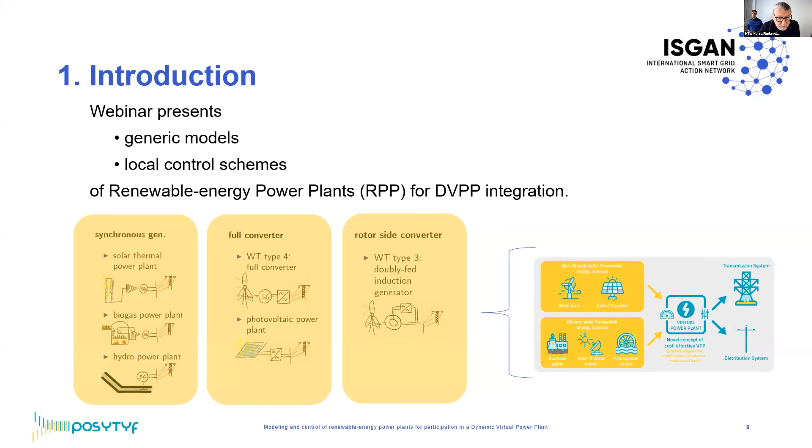So what we have actually, as mentioned before, we have different types of power plants: wind turbines, wind farms, PV systems, biogas, hydropower, and so on. That is very important because here we describe all these different types of technology by one unified model structure. That means we have a unified interface between the higher level and the lower level control. So we have some embedded local controllers, which I'll give you an example of how we have tuned this, and which model we have considered and designed. Then I'll give you later an integration of these different models into higher level things.

So here are the 4 important questions which we have addressed. The first question is, which RPP dynamics are important? RPP stands for renewable power plant. So which dynamics are important for higher level design? Then the question is which functionality we need, which is necessary for the design of a DVPP, and which kind of model structure can we use, so which are suitable for the dynamic representation, to represent dynamics, and also to take into account the needs of a control design. That means, are these suitable for a model-based design?

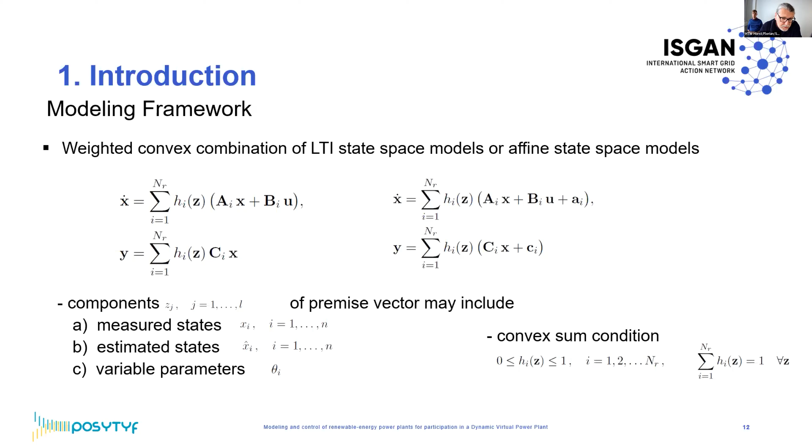Now I come to the requirements for the modeling. Our models need a reference input, which comes from the DVPP level for the devices. The devices depend on the applied control scheme. That means we have not just the physics of the system, we also have the control scheme, which is in the closed loop, and this is of course important. We have a closed loop system, so we have a strong dependency between the physical model and the controller in a closed loop. You see this on the scheme.

So here we have to distinguish for each of the devices between 2 main tasks, 2 main submodels. The primary power, that means the physics to transform the renewable energy sources, wind, measured by effective wind speed, and also, for the PV, the radiation. We convert this into a DC power, and based on the DC power, we're able to convert this in a way which fits here to the grid. So we distinguish between 2 different kinds of converters: grid following, grid forming.

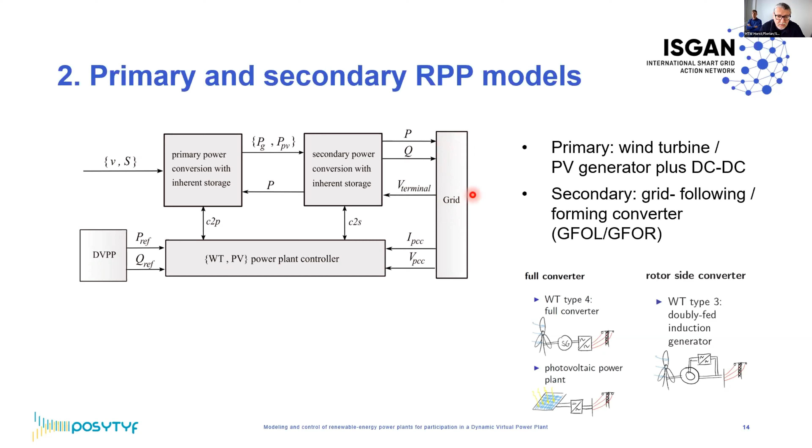So in total, we have here power plant control, which interacts both with the primary and the secondary power converter, and we have the external link to the higher level dynamic virtual power plant. And of course, this is the connection to the grid. We will feed the grid, inject the grid by power, and distinguish between reactive and active power. Feedback is the voltage terminal on the DVPP level, and this is on the local level.

So now I switch to the next task. This is where I take over. I'm Florian, and I will present the primary converter of the wind turbine at this point.

First of all, the objective for the modeling was to provide a process for the derivation of wind turbine models that are suitable for both control design and simulation studies. Of course, there exist different types and designs of wind turbines. In this case, we considered a three-bladed horizontal axis wind turbine with a power rating of 5 megawatts, and a type 4 wind turbine that is connected by a back-to-back converter to the synchronous generator on the wind turbine side, as shown here.

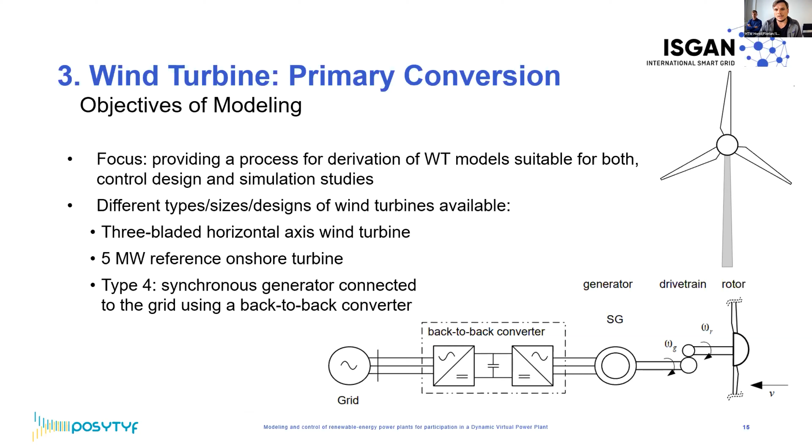For our wind turbine modeling, the main power dynamics are determined by the rotation that is influenced by the nonlinear aerodynamics. That is the reason we use the TS modeling technique Horst described earlier to model the aerodynamics, the drivetrain, and the mechanical modeling. While the mechanical modeling has little influence on the electrical grid, we still included this in our models in order to be able to evaluate the loading that would result in certain scenarios where the turbine is operated. As a renewable energy source, we use turbulent wind fields that can be generated according to different characteristics like turbulence intensity, and then calculate an effective wind speed that is fed into the wind turbine.

For the controller, we derived a controller that is capable of operating the turbine in a large operating range, which will be discussed in a second, and it is based on an observer that reconstructs the wind speed. This is important for monitoring and estimation of the available power, also for the control scheme.

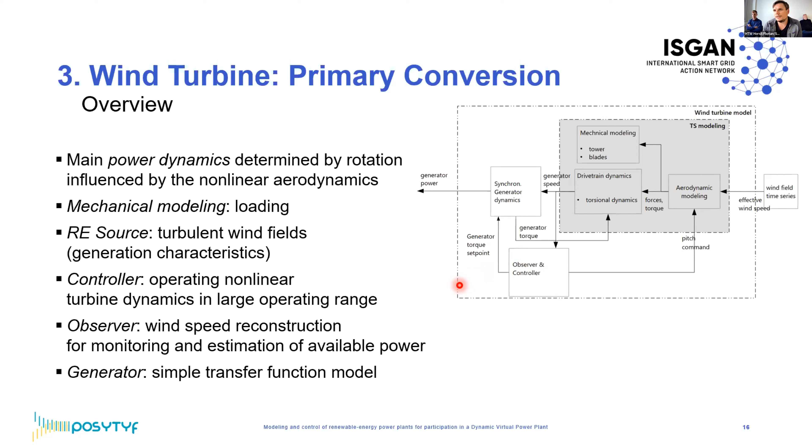The generator is usually just depicted as a simple transfer function due to the decoupling of the mechanical side and the electrical grid by the back-to-back converter in type 4 wind turbines.

So what we did here was we used FAST, which is an aeroelastic simulator, as the foundation for our modeling. This aeroelastic simulator is suitable for certification of wind turbines and is used in the industry for load evaluation. It inherits different degrees of freedom, like aerodynamics, towers, blades, drivetrains, or even platform in case of offshore wind turbines. It doesn't have any electrical connection, but it has a modular approach to parameterize the individual turbine components.

And then we use the built-in linearization functionality to derive the partial derivatives or Jacobians, and then integrate this into a TS model as shown here.

So when we have the FAST model, we perform a trimming analysis to find out about the steady-state input values that would result in steady-state behavior of the turbine in our operating points of interest, then use the linearization and then build up this model.

For example, we can see in this plot the pitch angle and the generator torque at different wind speeds and power operating points that would result in steady-state behavior of the turbine.

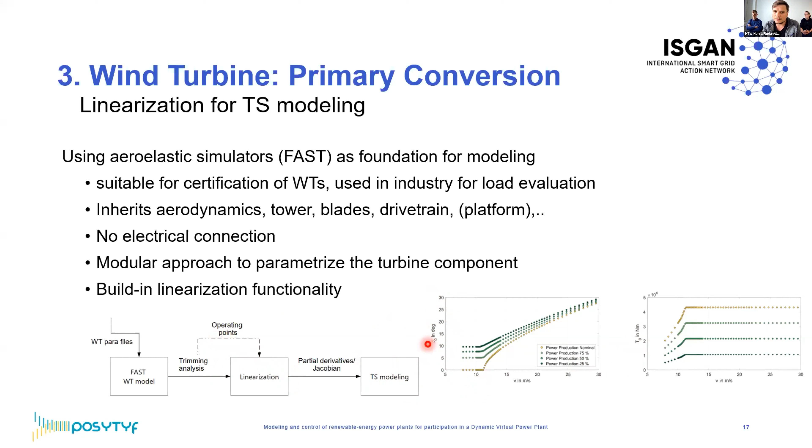Afterwards, we can simply build up a TS model for the entire turbine. So in this case, we decided to include the tower side-to-side motion that is shown here, the tower fore-aft motion represented by those states, and the drivetrain motion that is represented by those states, and integrate this into a TS description as given by Horst.

Therein, the wind speed is a premise variable of our TS description, and the wind speed is actually also treated as a disturbance to the system, as shown here. And the state space matrices that are used are gained by the linearization procedure.

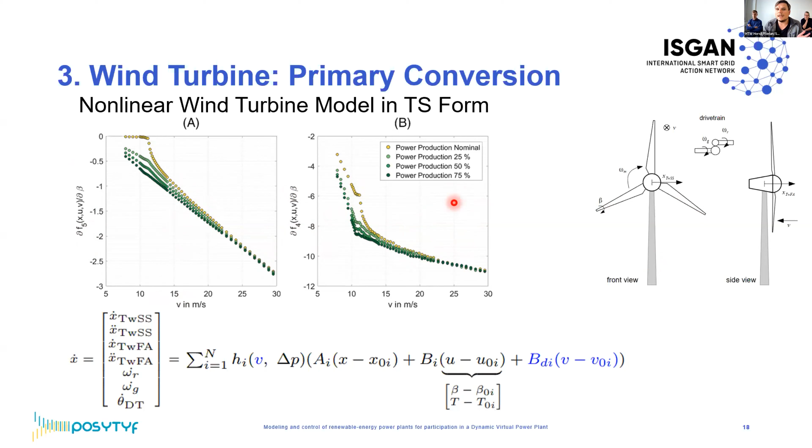So for example, here in the upper plot on the left-hand side, we can see the sensitivity to changes in the pitch angle of the rotation on the left-hand side, on the right-hand side of the tower fore-aft movement. And this clearly implies the nonlinear behavior that we are facing with the wind turbine.

So then there's a problem remaining, and that is the wind speed is usually unmeasurable for control purposes. So we've seen this equation before, where the wind speed is treated as a disturbance to the system.

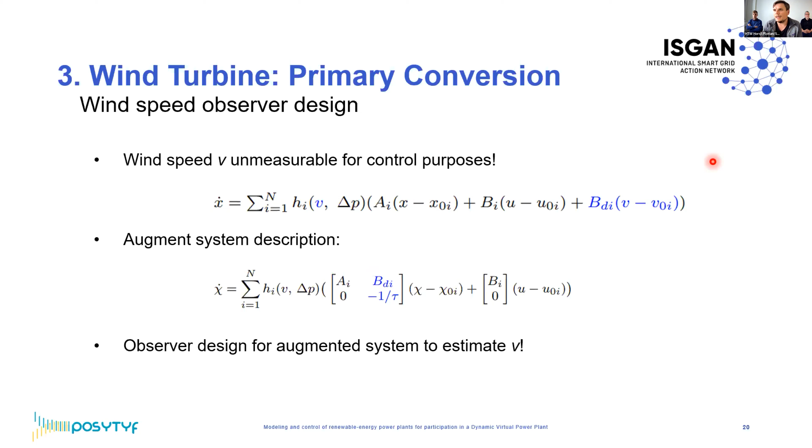And further, the wind speed observer allows for the implementation of condition monitoring systems, so-called digital twins. Also, the estimation of the available power. So when the power is not at its maximum, we can still use this reconstructed wind speed to identify the maximum possible power that can be extracted from the wind turbine.

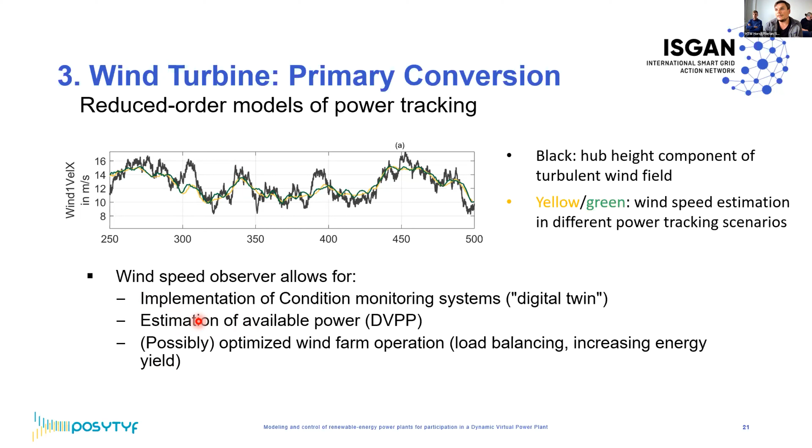And possibly we can enhance an optimized wind farm operation in terms of load balancing, or even maybe increasing the energy yield in total. But this is still subject to research and needs to be further investigated.

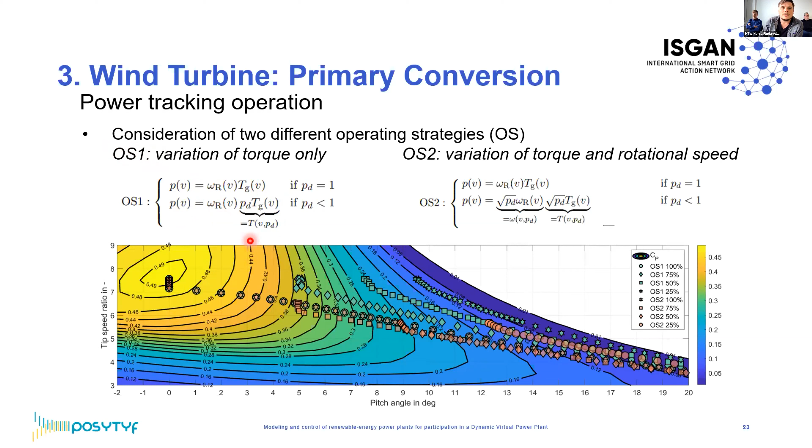So the question we were answering was: what are the different dynamical properties of different strategies? For that reason, we investigated two different strategies. The first, operating strategy 1, relies on varying torque only when we want to achieve the desired power level from the higher level control scheme, keeping the rotational speed constant but varying the torque depending on demand. In operating strategy 2, we exhibit a variation of both the generator torque and the rotational speed to match the desired power level, as shown here.

For a maximum power point tracking operation, which is the usual way the turbine is operated, both operating strategies actually share the same operating points. However, we can see that depending on the power level, we are operating at quite distinct operating points on this power coefficient surface.

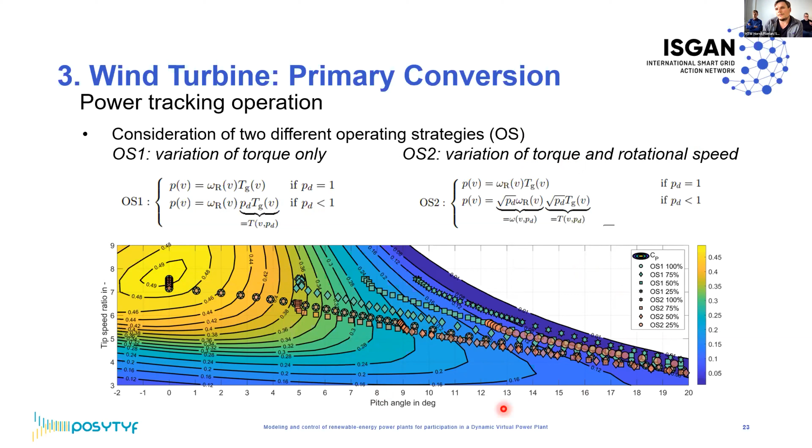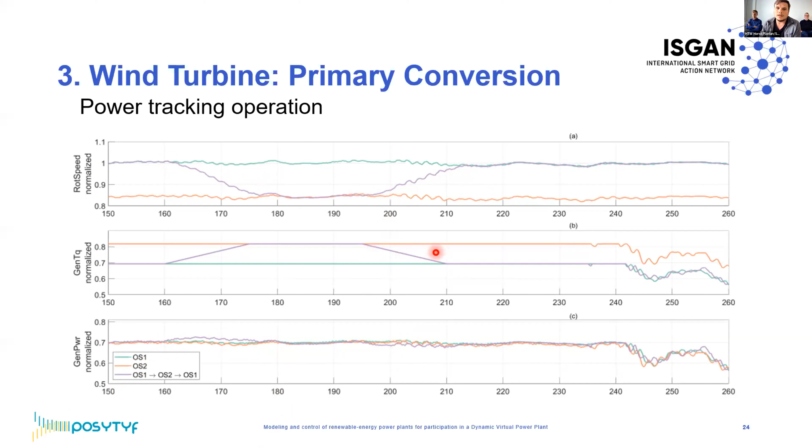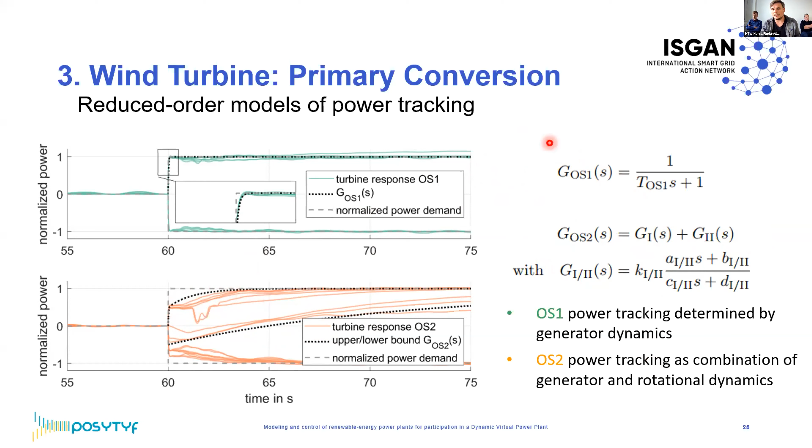So now I talked about the primary converter side of the wind turbine, and I will also introduce you to the secondary converter side that Horst mentioned earlier, and this will also apply for the PV system that Stephan will present in a second. So for the secondary side, as mentioned, we use a back-to-back converter to connect the turbine to the electrical grid, and there we included the DC link dynamics, and the main dynamics that govern this converter are the control schemes within.

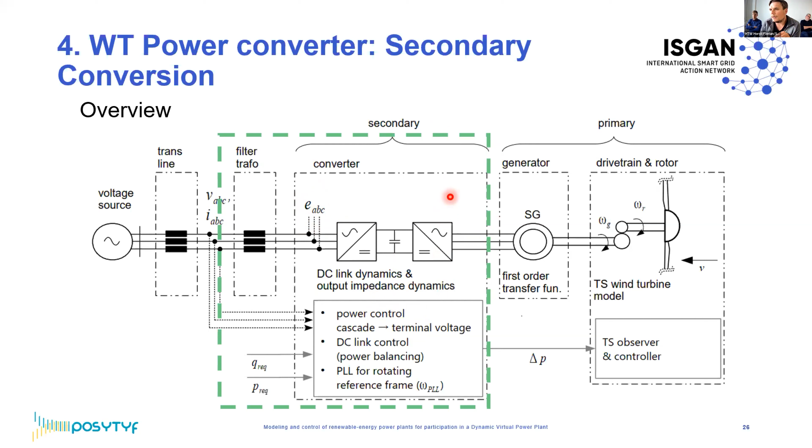So therefore, we consider two different schemes. The first one is the commonly used grid following scheme that relies on the use of a phase-locked loop, as shown here. So this is a simple power control cascaded with an underlying current controller, where we use the measurement of the current and the voltage at the point of common coupling to calculate the powers. Then this complex power controller generates a reference current that is processed by an underlying current control scheme in a rotating reference frame, and then we rotate this back to stationary frame and obtain our terminal voltage that is used as an output of the back-to-back converter.

On the other hand, we also included a grid forming scheme. The main idea here is to use droops on both the reactive power and the active power, where the reactive power droop sets a voltage magnitude at the terminal voltage, and the active power droop sets the rotational angular frequency of this reference voltage for the terminal voltage. Together they form a reference voltage at the terminal, and together with a measurement of the voltage at the point of common coupling and the parameters of the filter and the transformer, we can algebraically relate those two voltages to obtain reference currents. Those reference currents are then processed by an underlying PI control scheme for the current that then sets the real applied terminal voltage.

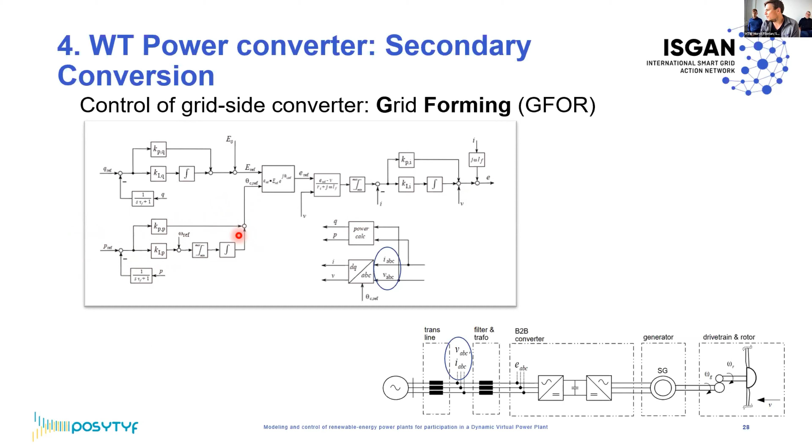Okay, this was the short introduction to the wind turbine and the secondary conversion. And now Stephan will follow with the PV generator side.

Okay, hello to everyone. In the following slides, I want to give a short overview about the PV power plant generation and the model we implemented for this.

On this scheme, we see an overall overview. We have the primary conversion on the right-hand side and the secondary conversion Florian mentioned before on the left-hand side. On the right side, we start with the irradiation S, which is fed into the electrical model. We also have a temperature model, but in this presentation it is neglected because in the time range we usually simulate, the temperature change is not that much, so we can ignore it. So essentially, the PV module consists of the electrical model.

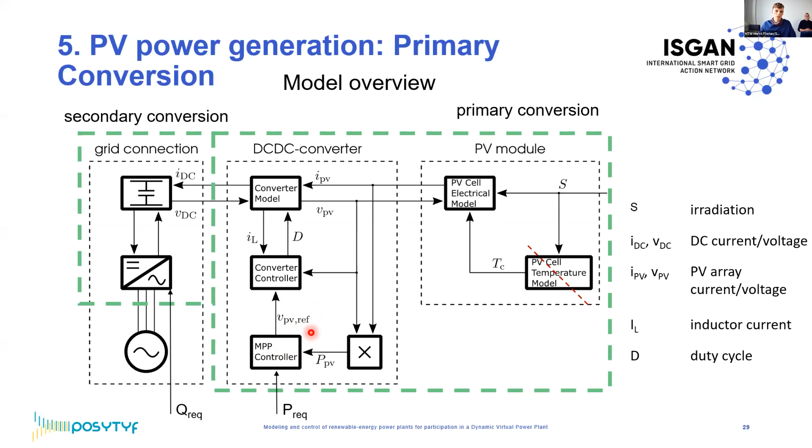This electrical model is connected to the DC link via the DC-DC converter. Therefore, we have a converter model, which is controlled via the duty cycle D, which itself is controlled by a converter controller. This converter controller tries to set the PV voltage, and this PV voltage reference value is generated by an MPP controller, or in case of a demand power point controller, in the case when we have requested power.

Okay, in the following, I will start from the right to the left and give an overview about the components in the primary conversion.

First of all, we have the electrical cell model for a PV cell. On the left-hand side in the circuit, we have a diode and resistors. We set this resistor RS to 0 just to obtain an explicit equation for the PV current in dependency of the PV voltage, which is given in equation number 3.

What we also need is the relation to disturbances like irradiation and temperature. Both values affect the efficiency of the PV module, and the difference to the standard test conditions in S and in T can be taken into account by these equations.

Some parameters are left, like AN and VT. These parameters are set, or we get this parameter by a curve fitting to the characteristic given by the manufacturers of the photocells.

If we connect multiple photocells together, we get the PV module, and we can connect them in parallel or in series and add together the voltages and the currents correspondingly.

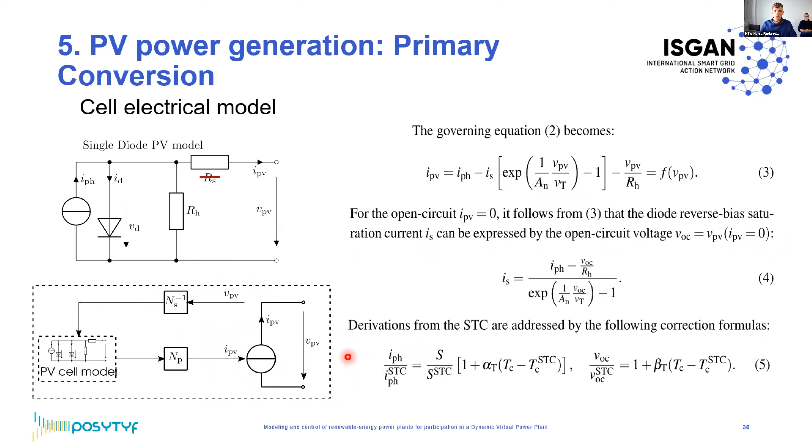What do the characteristics look like? On this slide, on the left figures, we have the dependency of the PV current and the PV voltage, and the PV power over the PV voltage. We see that for different irradiations, the generated power differs very much, which is not surprising, but the point where we can generate maximum power, the PV maximum power voltage, doesn't differ so much.

If we want to generate less power, maybe if we only demand a part of the power we can generate at the current state, we can either go to the left or to the right of the maximum power point, and this can be controlled via the PV voltage, which we adjust by the DC-DC converter I will explain in the next slide.

On the right-hand side figure, we can see the dependency on temperature, and here we see a dependency of the maximum voltage for the maximum power point and the maximum power as well. But as I mentioned before, the temperature dependency will be neglected in these slides.

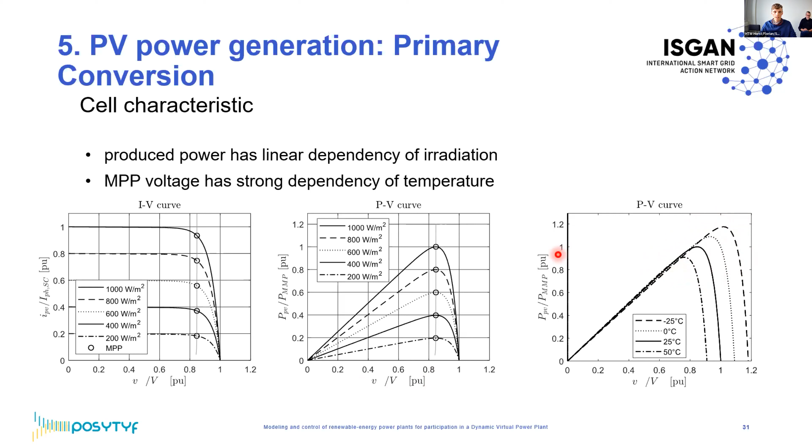Okay, take a look at the DC-DC converter. In our case, it is a buck-boost converter. As we can see on the right-hand figure, it connects the PV voltage from the PV module to the DC voltage at the DC link, and this connection is controlled via the duty cycle, which controls the switch.

For an average model, we can see the static relation between the DC voltage and the PV voltage in this figure. We can see it is a nonlinear behavior, and at least in theory, we can reach every ratio between 0 and infinity.

For dynamic analysis, we introduce two states. The first state is the PV voltage, and the second state is the current through the coil. This gives us the state vector, and the dynamic state equations can be seen here on the right-hand side, where we see this function f, which is again the PV current's dependency on the PV voltage, is a nonlinear function, so the system is nonlinear.

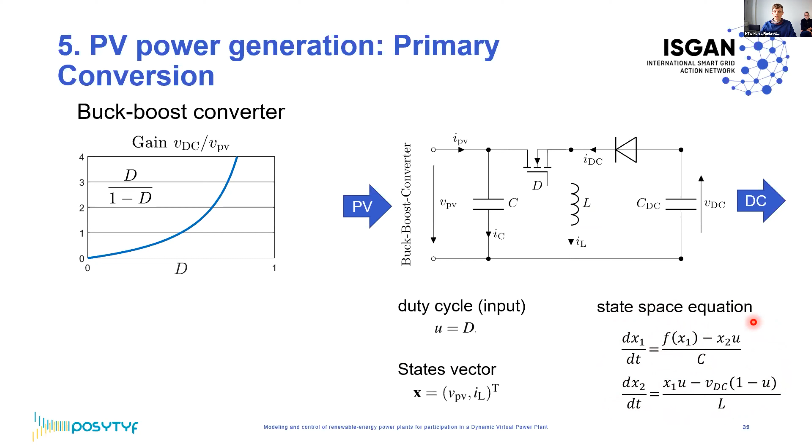For further analysis, we linearize the system and take a look. Here we see on the left-hand side the linearized equations, and on the right-hand side the eigenvalues for different PV voltages. What we can see is that for increasing voltages, the system behavior changes a lot.

So let's say we pick one PV voltage as the operation point, linearize the system at that point, and develop a controller for it. We can't guarantee that this is a good controller for any other operation point. Therefore, we first start with a single linear controller, run a simulation, and see that the performance is not good, and then we introduce a more advanced controller scheme.

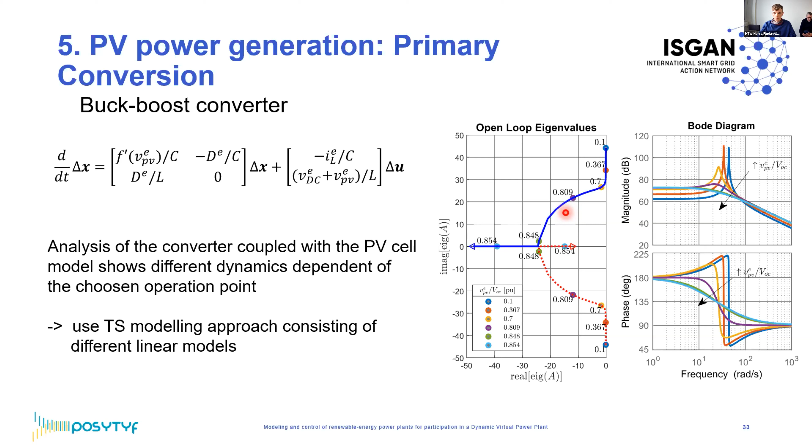So the next slide is about the converter controller. In the first equation, we see a state-space controller, which is a linear controller, and this is the starting point. Here we have the feedback of the states, and here we have the integral part.

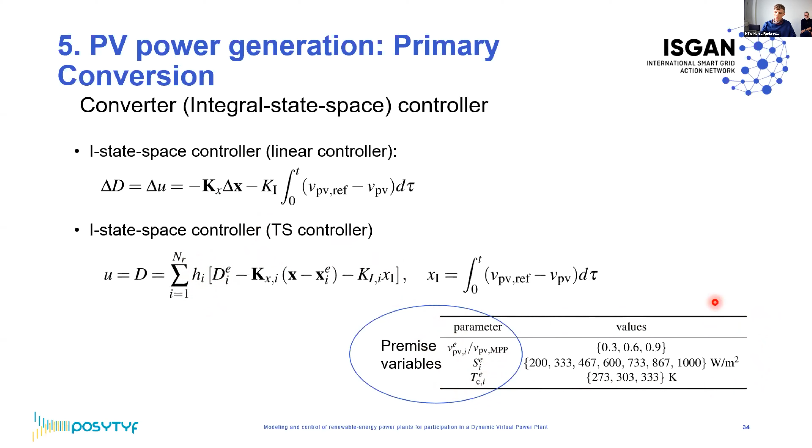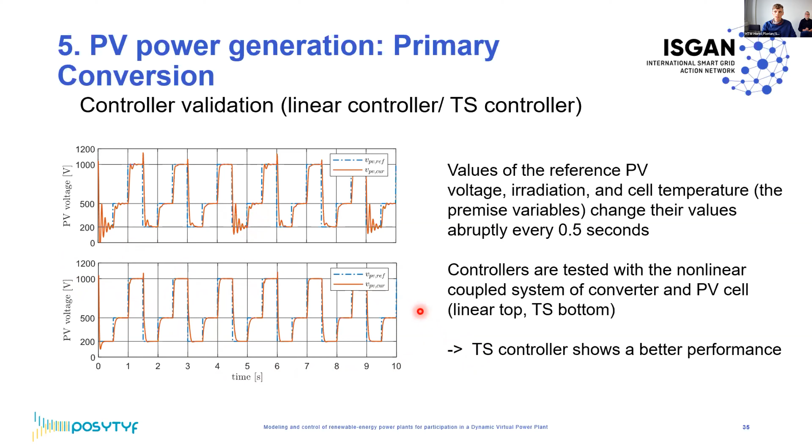So we stick to this controller and use it for our closed loop system. In the next step, we want to talk about the power point and how we can reach it, the maximum power point.

The classic approach is to always feed in the maximum power that can be achieved. This is the maximum power point tracking algorithm, and here we picked one, the perturb and observe algorithm, which essentially works the following way.

We perturb the system, so we change the PV voltage and then observe the reaction of the system. The reaction of the system is the produced power. If the power is increasing, we keep going with the perturbation in the direction we already had. If the power is decreasing, we reverse the direction of the perturbation. So finally, when we reach the maximum power point, we will step around this point.

This is basically the algorithm, which can be modified to increase the speed or the accuracy, and also the robustness against changes of the irradiation, which means that the characteristic is changing.

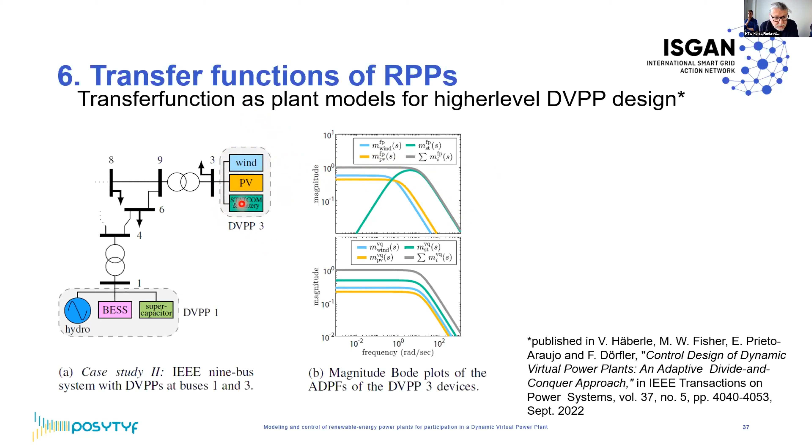So this gray line is the sum of all three, and these transfer functions represent the dynamics of the closed loop behavior of the wind, the PV, and the STATCOM battery. The link to our project is that we are able to describe the behavior of these local devices by transfer functions for different paths.

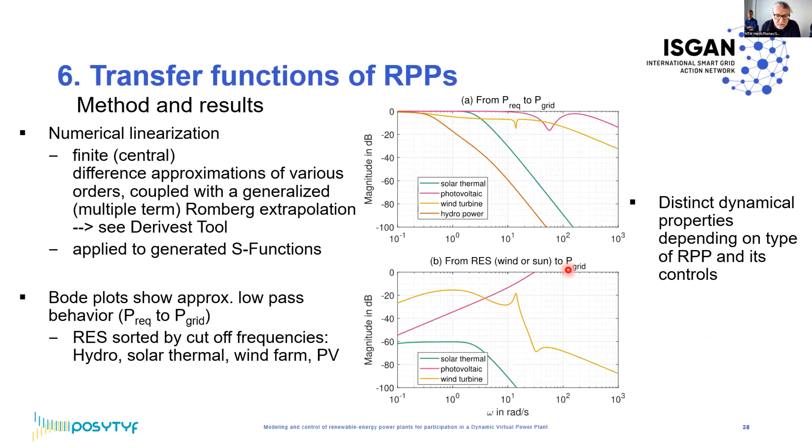And you see here the PV dynamics. So now we are able to use these models based on physics and control to take into account into a higher level controller. Here, some other ones. So the key...

The result is that the operating strategy of one wind turbine is similar to the dynamics of a wind farm. You see here the comparison between wind power plant dynamics with two power tracking operating strategies, what Florian mentioned before. We can change the power only by the generator torque, or we can change the power by both the torque of the generator and the speed of the rotor.

What is important here is that the operating strategy based on the first approach has a much better dynamics in the sense that we have a higher bandwidth, so the bandpass frequency is higher and drops later. That's important, so we can follow the request of the power much better than the second strategy. And this also shows the comparison between the grid forming and grid following converter.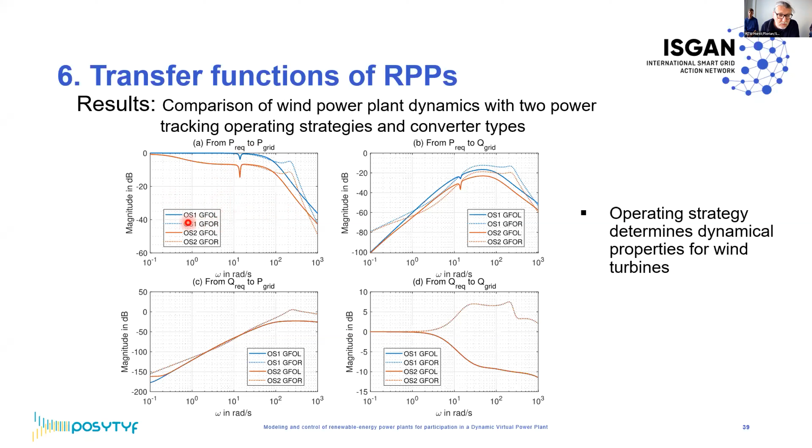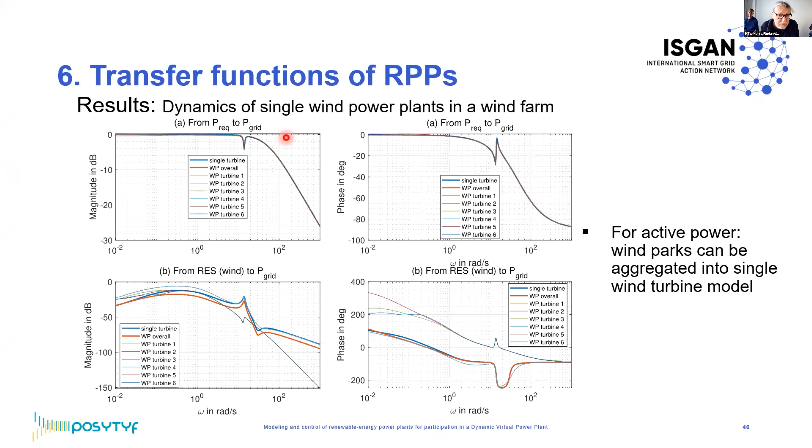Based on this, the third slide is the comparison between single wind turbines and the wind farm. You see here that the wind farm is close to the behavior of the single wind turbine. This gives us the argumentation that it's possible to aggregate a wind farm by a single turbine, based on this transfer function behavior.

Now come to the conclusion. We are able to give you a hint and some results based on the questions before. We have shown you the modeling of a primary conversion and secondary conversion with closed loops for PV and for the wind turbines. We have also integrated the forming and following converter dynamics into our approach. And we have described and shown you suitable models which describe the dynamics of the RPPs, which can be integrated into the higher level controller.

So first, we have models for simulation only. If you are interested in simulation, you can use the models and integrate them into commercial software if you like. Or you can also use these models as a starting point for control-oriented design of DVPP, because here we have reduced models which fit to the DVPP approach.

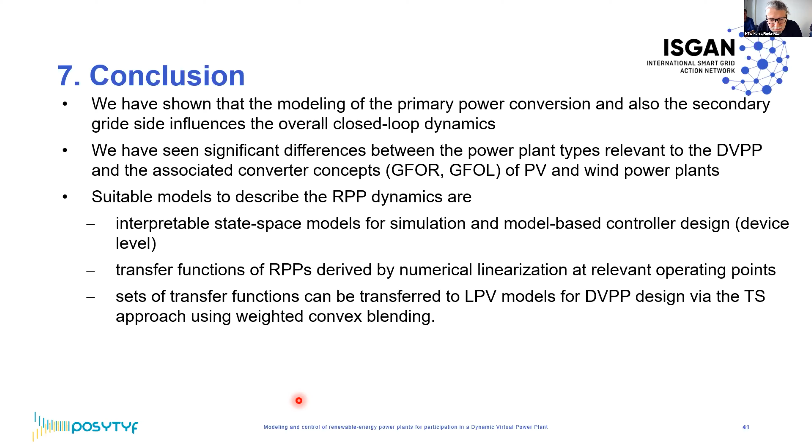So that's it from my side. Now we have actually 12 minutes for discussion, and I'm happy to see if you are interested in some points so we can discuss it.

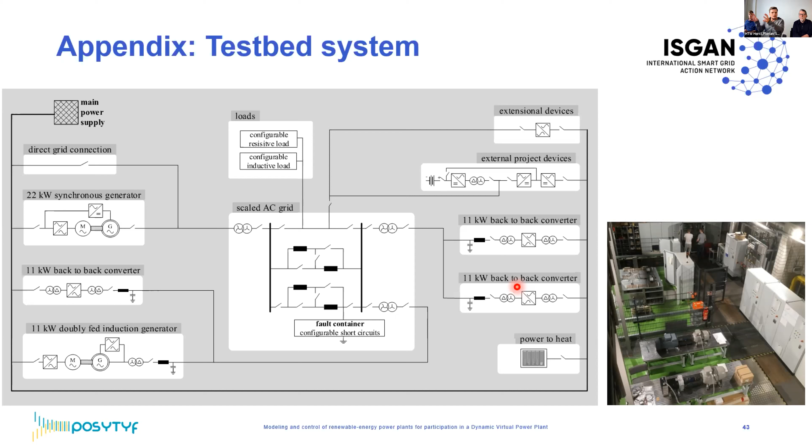We always connect them to a very simple grid at this point. Within the project there are partners who develop more elaborate grids, and we interconnect our local devices with those advanced grids. If you look at the GitHub, you will see every device is connected to a very simple grid that emulates some behavior, but also has the possibility to perform frequency changes, voltage drops, and all that is tested there.

And then our partners supply us more advanced grids, and then we connect them. Okay nice, so it's not strictly necessary to have this framework for hardware simulation. Okay, thank you for your answer.